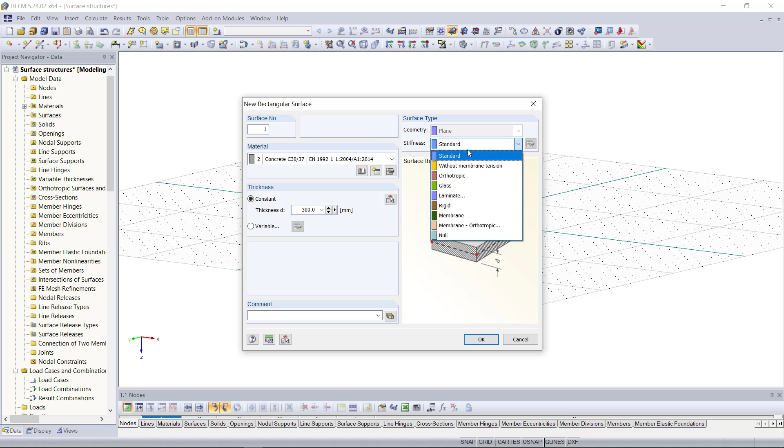And then under surface type, we can choose some additional options regarding the stiffness and with that structural behavior of the surface. We can choose, for instance, without membrane tension, or we can choose a rigid one. But for our example, we don't need that, so we will stay with the standard type.

With clicking OK, we can select 2 points in the graphical area to create the surface. Up here, we can change the view to the top view. This makes it just a little bit easier to snap those points. So the first node will be at 0 and 0, and the second one at 10 and 10.

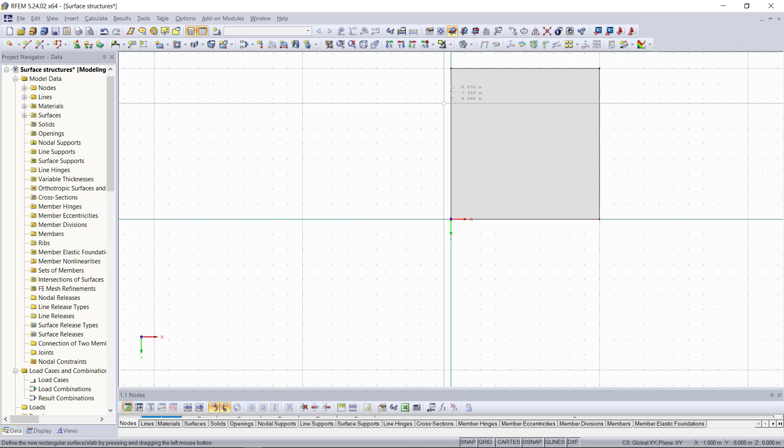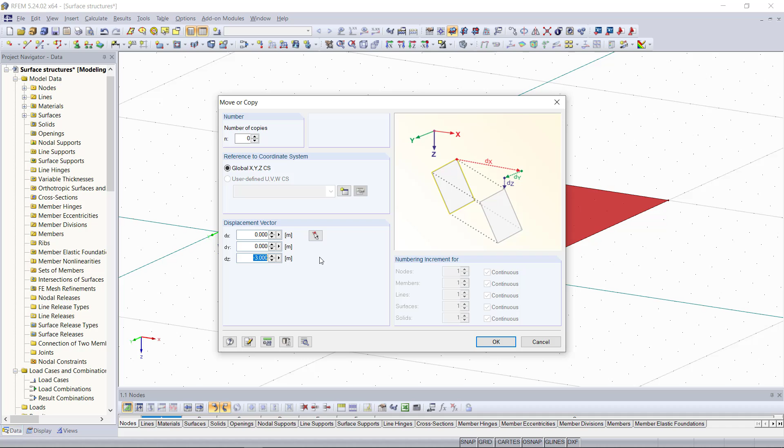Then we will move the surface with an offset of 3 meters along the z-axis. For that, we use again the copy and move command, which we can find in the toolbar, or we can also find that with right click on the surface. Since we don't want to copy this one, we can keep the number of copies as 0. And in order to move it, we just type in the z direction -3 and then click OK.

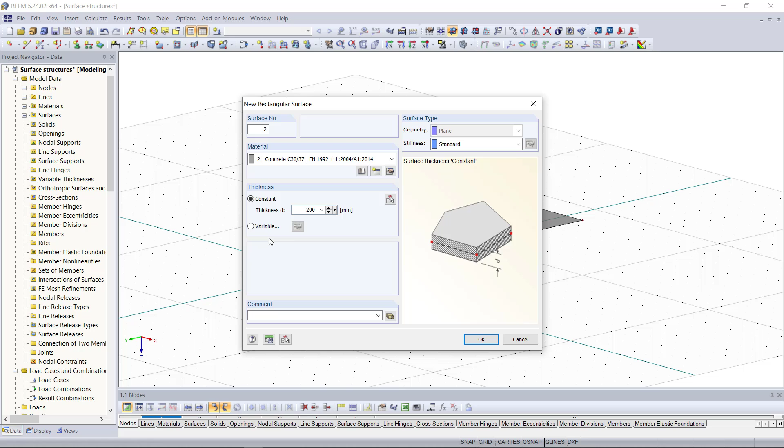Now that we have our slab, we will create 4 more surfaces, which will be our walls. And for that, we click again on new rectangular surface. In the new dialog, we can keep the previous settings except the thickness. Our walls will have a thickness of 200 millimeters, and then we can graphically insert them along the edges of the slab. A great help during modeling these surfaces is if we change up here the plane, we can easily snap those points and create those surfaces.

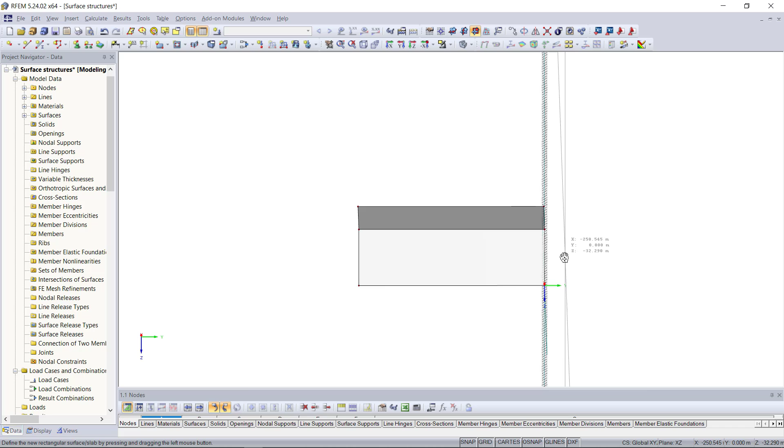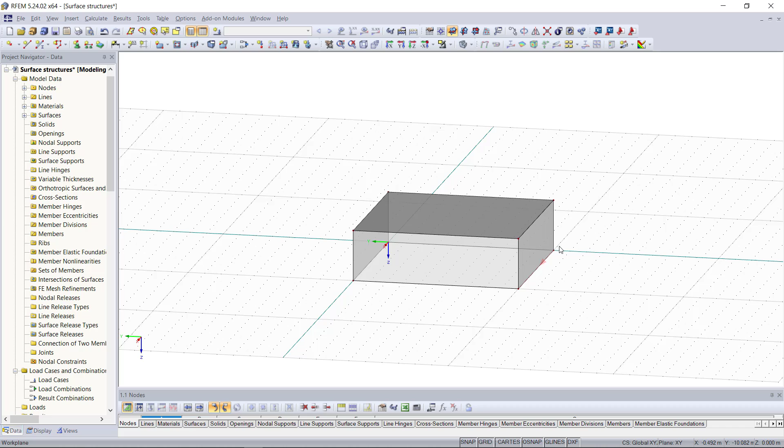Now that we have our structure, we need also some supports. And for surfaces like walls, in order to create the supports along their edges or along the bottom lines, we can find up here the symbol called line support. And we will choose hinged ones, and then with clicking OK, we can assign these very quickly to those lines.

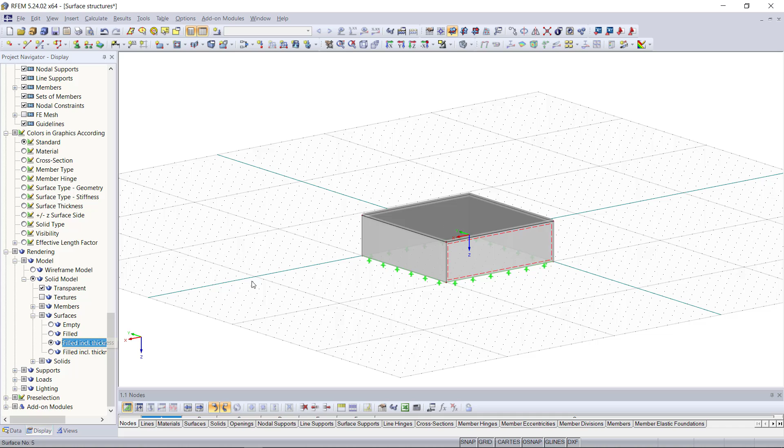You might notice that there is no thickness displayed for the surfaces that we've just created, although we've entered a thickness back in the surface dialog. So this is just a view setting. We can get it displayed if we go to the display menu and then choose rendering. Under model, here we can choose filled inclusive thickness. Just as a hint for you, and as we can see it now in the graphical area, the thickness is rendered on these surfaces.

So we are almost finished with our structure. Just for more stability, I'd like to create a column in the middle of the slab. For that, we will divide it into 4 identical surfaces so that we can get the middle node for the column. And then later, we can also apply a load on each of these surfaces within 4 different load cases.

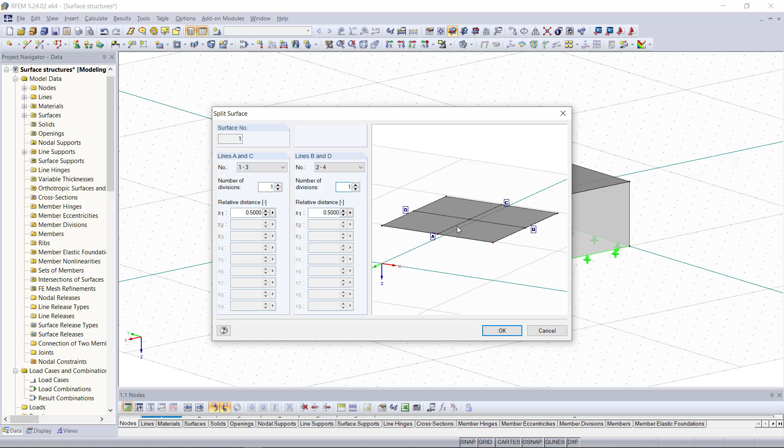And now we can create the column at this middle node of these surfaces. So we will select new single member up here, and then as cross-section, we can enter a rectangle with a height and a width of 300 and concrete as material.

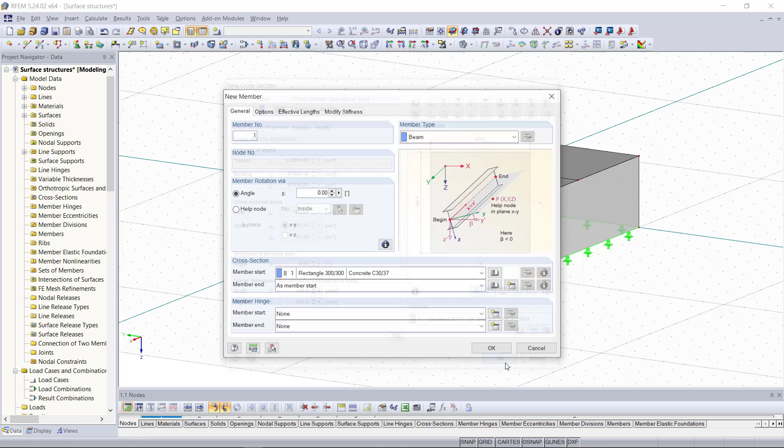And then we will add also a nodal support to this column. Now that we have our structure complete, we will move on to the load cases and loads. Before we get started with defining any load case, we will first go back to the general data. The dialog for that we can open up with right-click and then select general data.

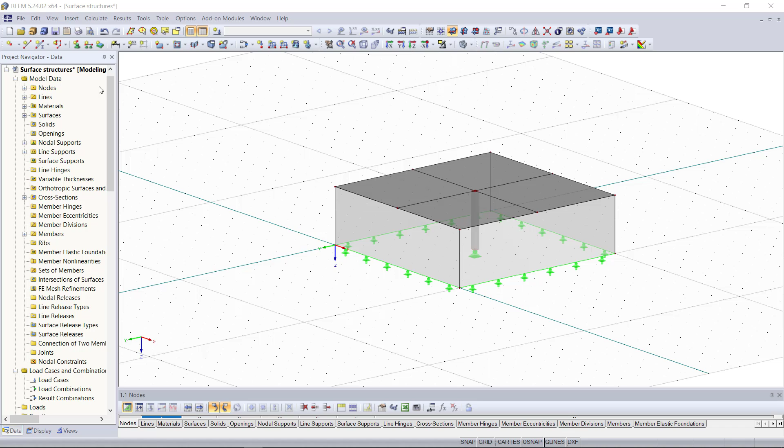What I want to do here is to activate the option called create combinations automatically. So first we can determine the standard type, for example, the European one and the German national annex for it. And then we can activate this option here. This will allow us that the load combinations of the load cases that we will define later are getting generated automatically, since we have this time a couple of more load cases than usual. And with OK, we can close this dialog and start defining the load cases.

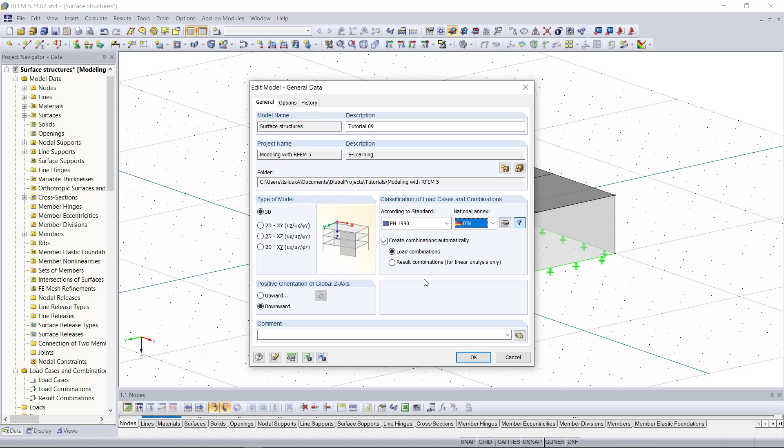So the first load case is, as usual, the self-weight, and then we will create 4 more load cases. Assuming an office building above our slab, we will choose this action category here, and let's say we call this one surface load 1. Then we can copy this one 3 more times and rename them to surface load 2, 3, and 4. And then we can assign a surface load for each load case with changing the surfaces.

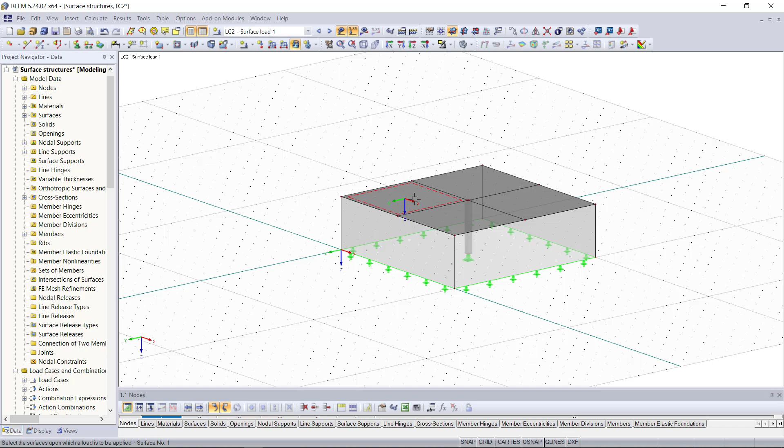So we will choose the right load case up here and then click on this button called new surface load. Similar to the dialog for a distributed load, we can keep load type as force. The direction will be global z direction. As a load parameter or magnitude, we will enter here 2.5. And then we can apply it to each surface.

With the loads applied, we go once again to the load case settings, and under combination expressions, we can set all possible settings for creating combinations automatically. There is, for example, the option called reducing number of load cases, which can be very useful if you have a couple of more load cases than we do right now. It allows us that the number of combinations is getting reduced to the essential. Otherwise, RFEM would create every possible combination, even if it's not decisive. In our case, since we only have 5 load cases, we don't need to activate this option here.

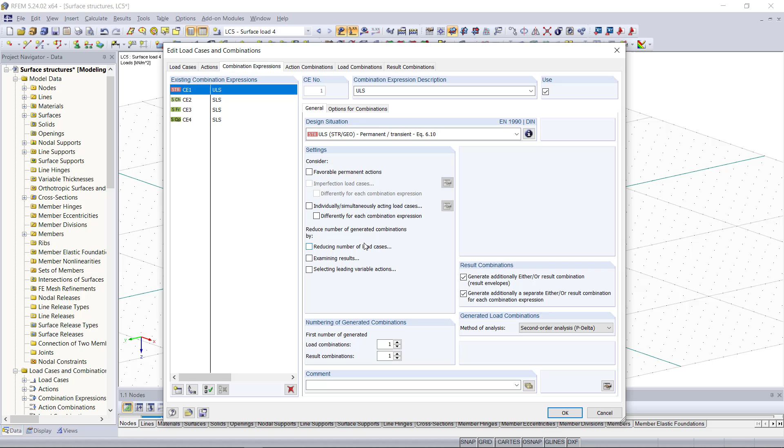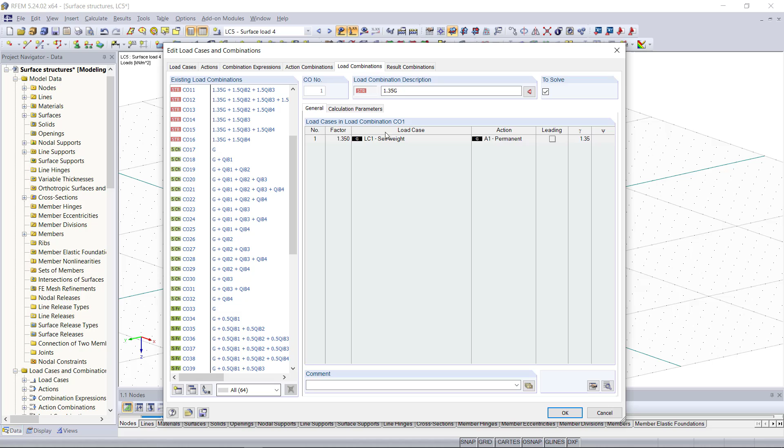Then in the next tab called action combinations, we can define and edit the action combinations according to the standard or standard type, including the serviceability limit state and the ultimate limit state. Next, under load combinations, we can see the load combinations, which are generated automatically, and if necessary we can also edit them. Right now, for our example, we have in total 64 different combinations, as we can see here. And then the last tab is called result combinations. A result combination superimposes the results of load cases, load combinations, or result combinations according to the preset combination expressions.

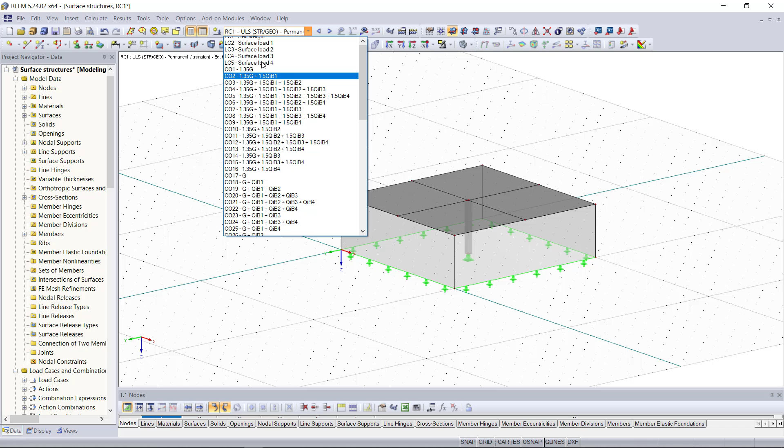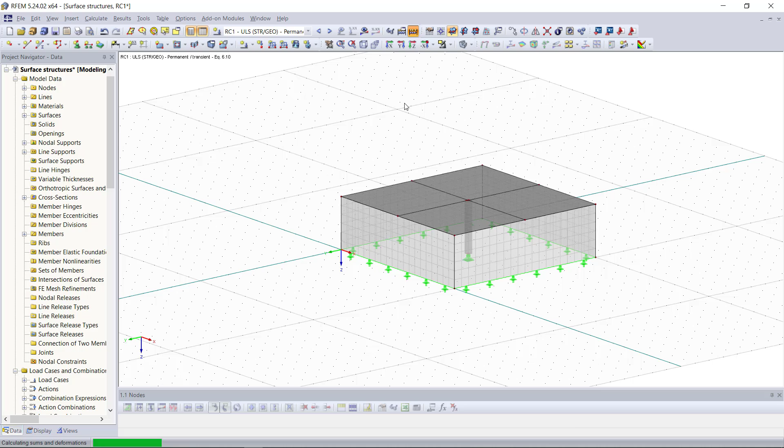If we click OK, we can have a look at all combinations up here and then check if the load cases were combined as we like. And then we can run the calculation for our system. And since we have a couple of more load cases and combinations, this will take just a little bit longer than usual. Now we can display the internal forces and deformations for each combination which we choose up here.

So this was our tutorial about modeling and calculating surface structures, and the next video will be about modeling 3D structures.